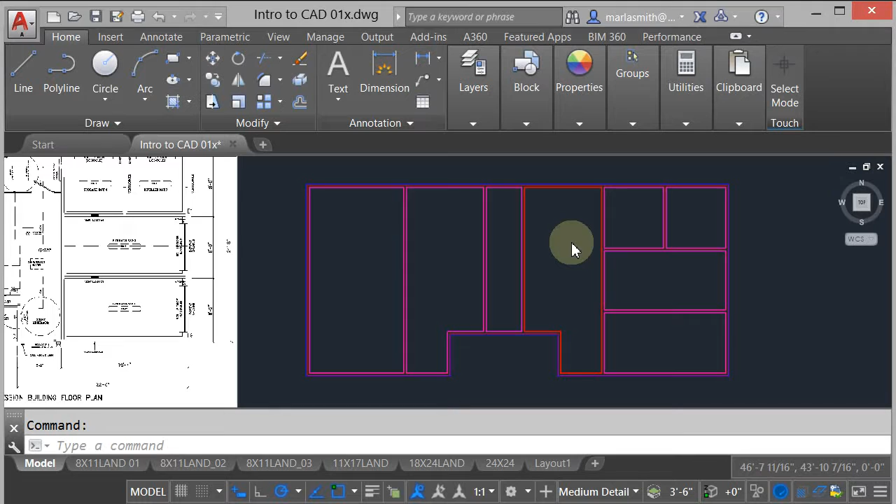So to put the doors and windows in, I have given you a series of windows and a couple of doors, the overhead door and the entry doors, that you can use as blocks. So we'll go ahead and use these.

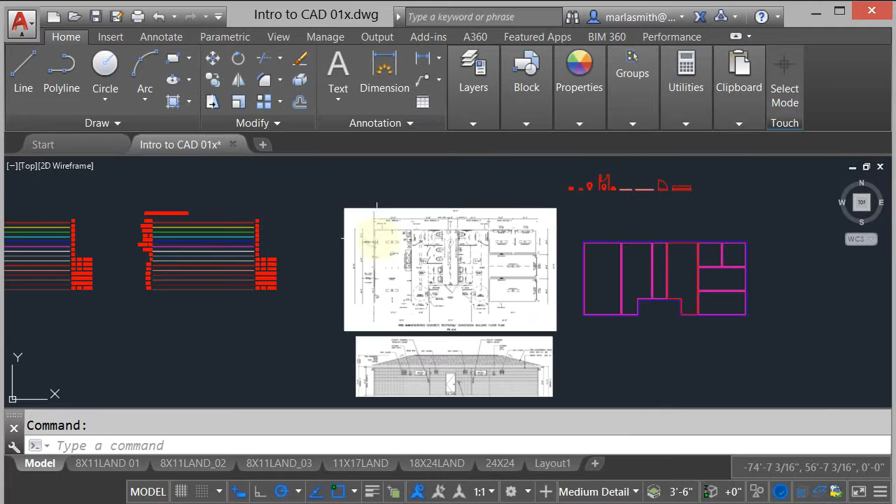The first door I'm going to put in is this door here into the concession stand area. We know that door is 4'4" from the end of that wall. So what I'm going to do is just copy this door. If I select copy, select that door, right click to stop the selection set, I'm going to make a copy of it over to near where I want it.

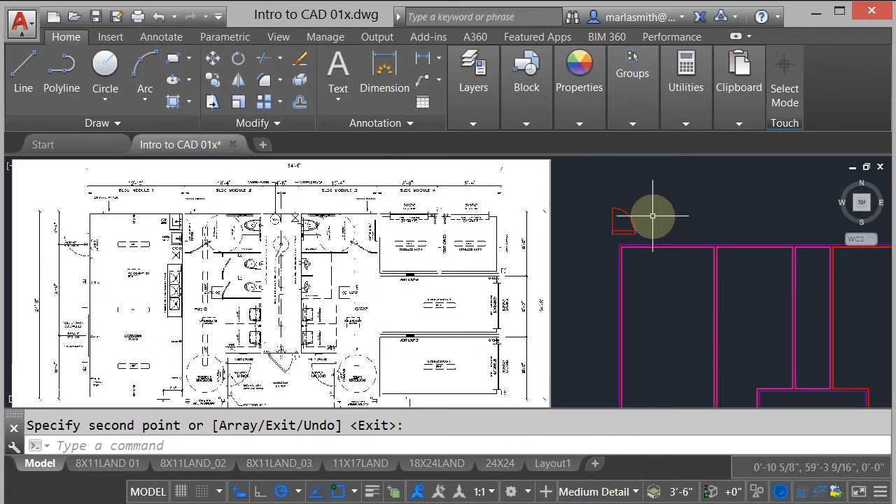I'm going to left click here and then right click and enter to stop the command. Now if you look over here, the door needs to be facing the other way, so I'm going to rotate it. There's a couple of different ways to rotate it. I'm going to use the rotate command right here.

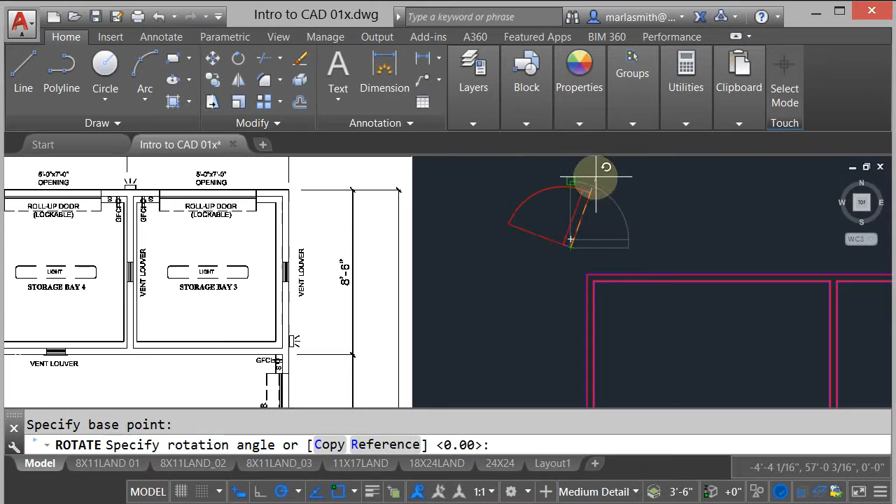So if I click rotate, select the object I want to rotate, right click to stop the selection set, and pick the point at which I want to rotate about, the base point. I can then use my polar to flip it around the other way. So I'm going to flip it there.

Now, the swing needs to be the other way. So in order to get the swing the other way, I need to mirror that. I'm going to use the mirror command, select the door, right click to stop the selection set, pick a point to mirror about.

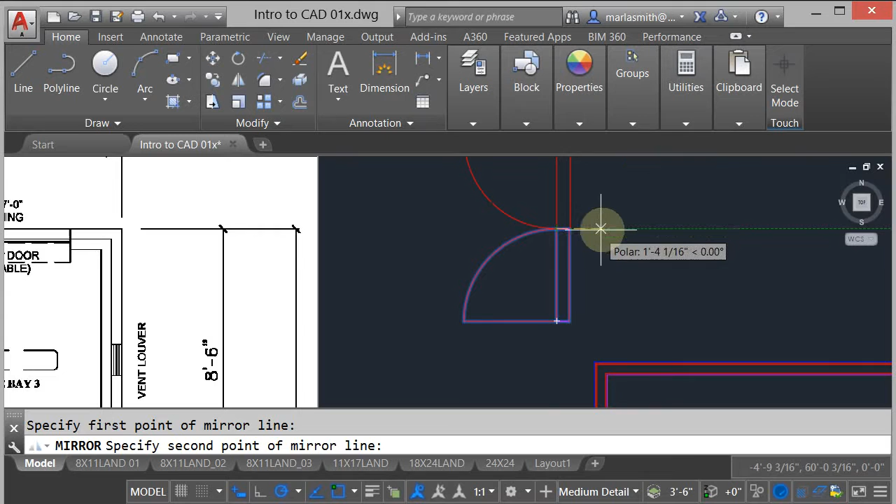It's not really critical where I pick this point. I just want to make sure that after I pick it, I drag horizontally so it will flip it horizontally, as if it's looking in a mirror. Then if I left click, it says erase source object, and I'm going to say yes. So I'll select yes right here, and it will erase the source object.

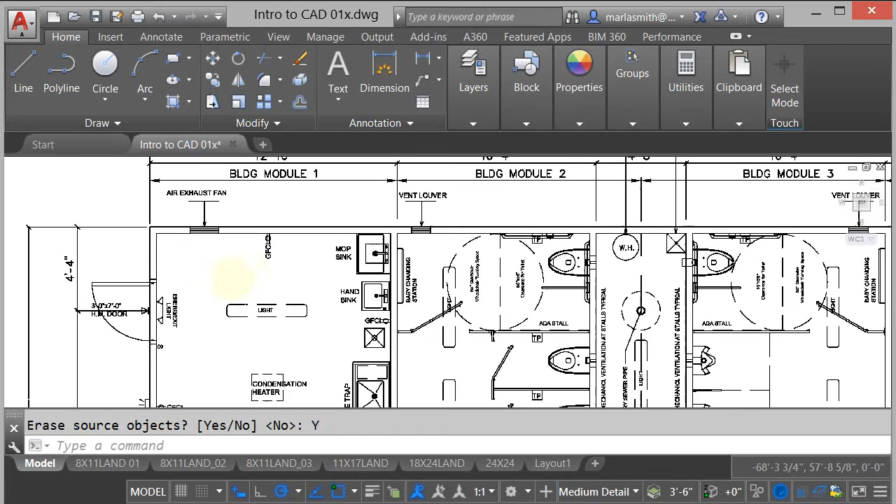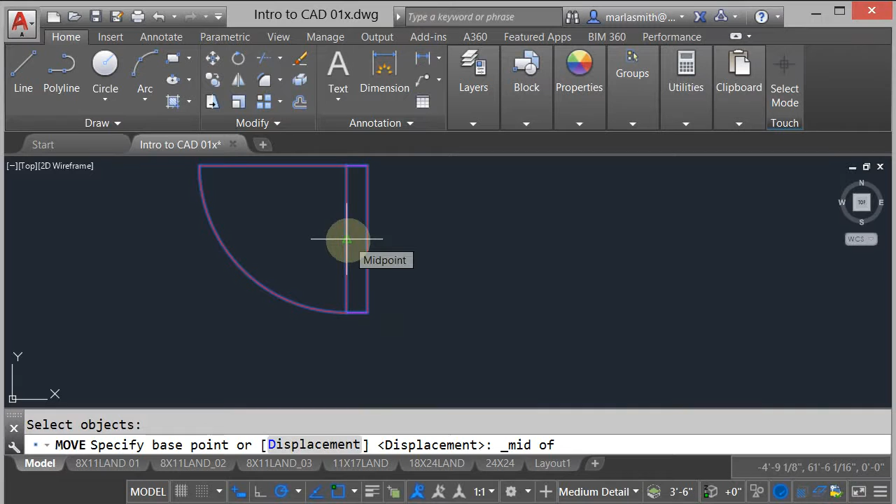Now I just need to move it into place. Again, it's 4'4" from the wall. So I'm going to go to move, select the door, right click, and pick the midpoint of the door. I don't have that snap running, so I'll right click, shift right click, and do my snap overrides and pick midpoint. I'll pick the midpoint of that door, and pick the end point of the stud wall, because I'm going to assume that all dimensions are from stud. So there's the stud wall.

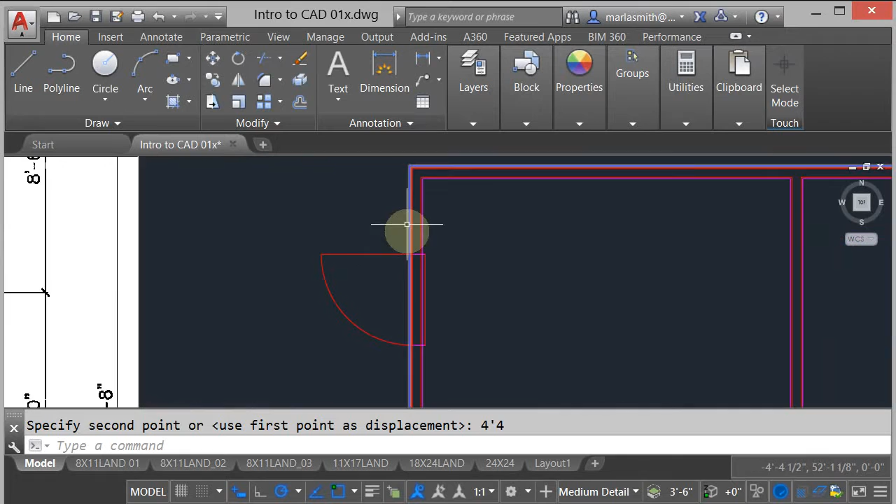And then I'm going to move that door 4'4". Now it's in the correct vertical, but it's not in the correct horizontal. So I'm going to move it again. Select, right click to stop the selection set, pick this point and just move it to there.

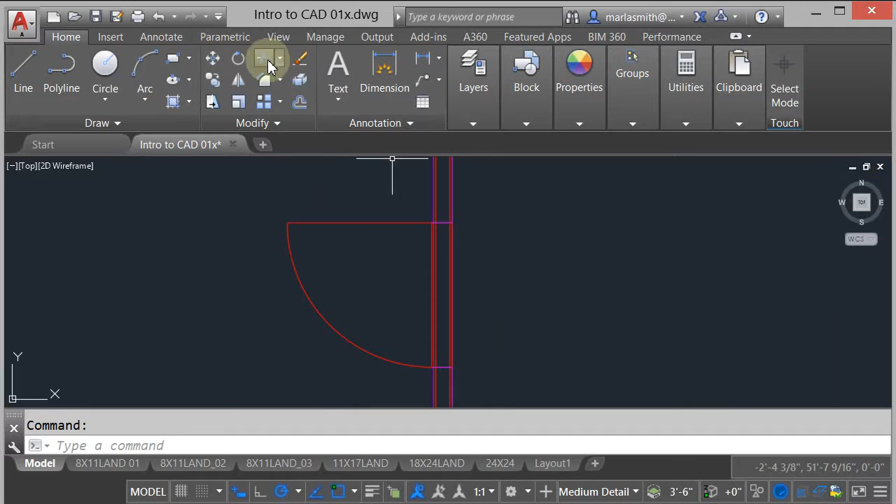Okay, now once I've got that in, I don't want all those lines in between there for the wall, so I'm going to need to trim them out. If I go to trim, I can pick the cutting edges. So if I pick that and return, I can then come in and it will trim out the lines.

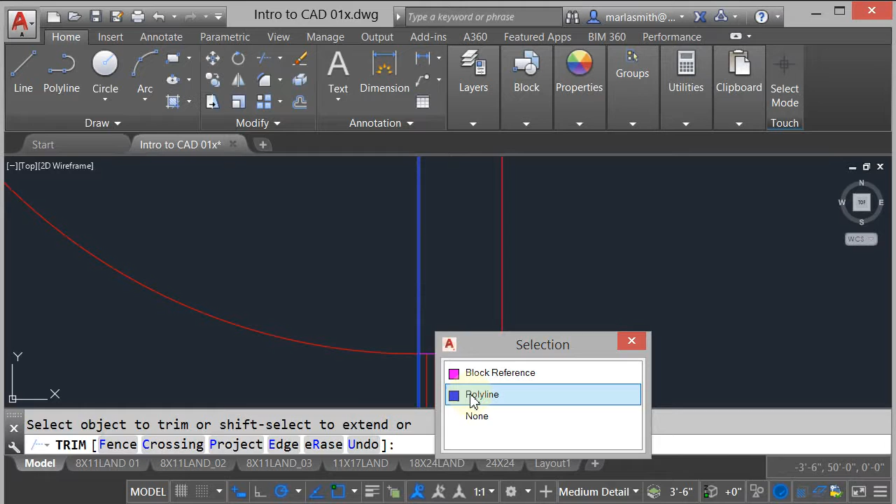You're going to have to pick the polyline, because it won't trim the block reference, it'll trim the polyline. And if you pick on this one, even though it says none, it'll give you the option to pick the polyline. If you're not getting that option, make sure that your selection cycling is on. Okay, so now I've got a door and it's trimmed out the inside of that.

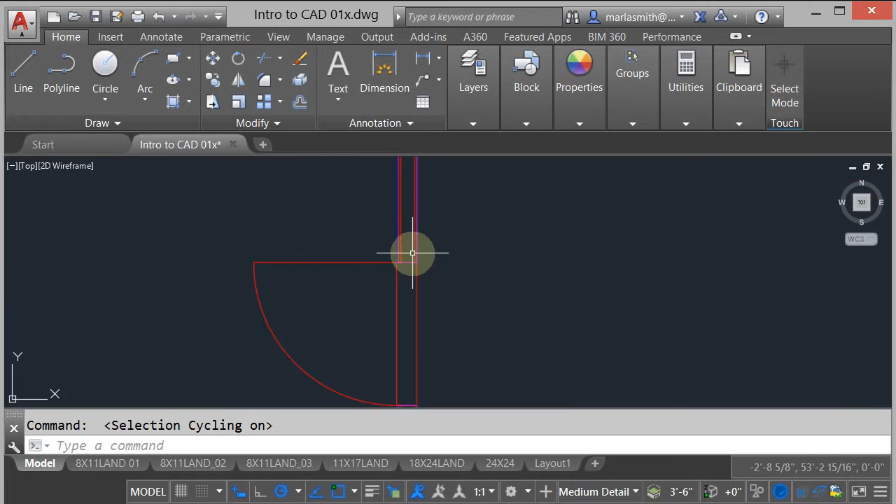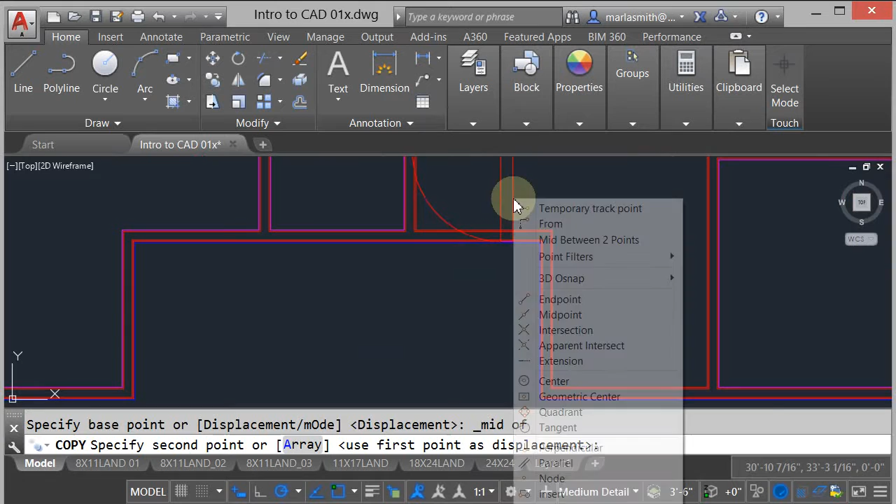Now, these doors, you can assume that they're in the middle of the wall, so you could just copy, select that door, copy it from shift right click midpoint of here to shift right click midpoint of there, and get it in the right horizontal place. And then just move it.

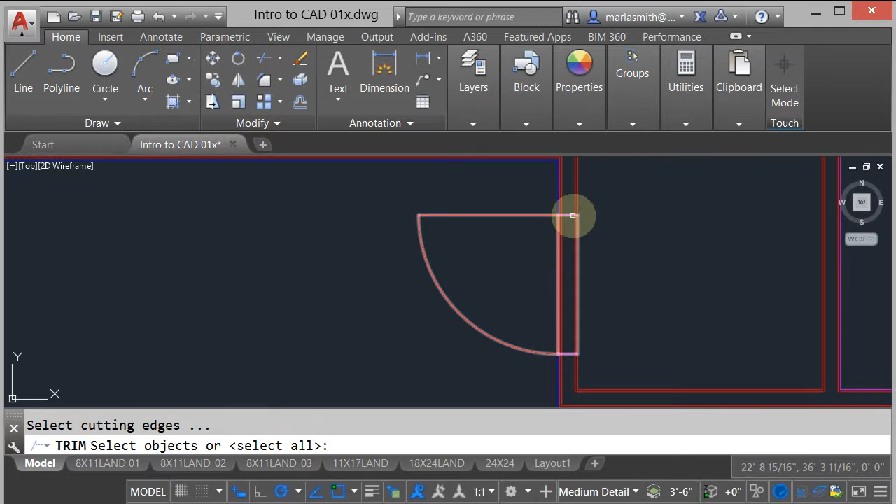So I'm going to go to the move command, select this, move it from this base point to that point, and then again trim it out. So trim, pick that, and you could do a crossing box right there and see if it'll work. Trim, pick that line and pick that line and right click, and if you do a crossing box, it'll just trim everything it can in between those two. So dragging from right to left and then enter.

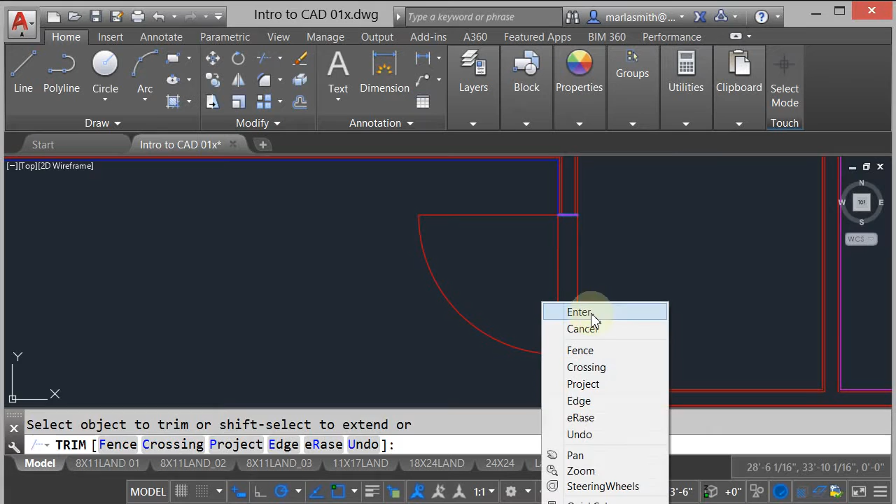And then you can actually mirror this one over to there. So you could go mirror, select that, right click, pick the midpoint of this, flip it over there, and then trim. Whoops, sorry, I didn't complete the command, so it erased it.

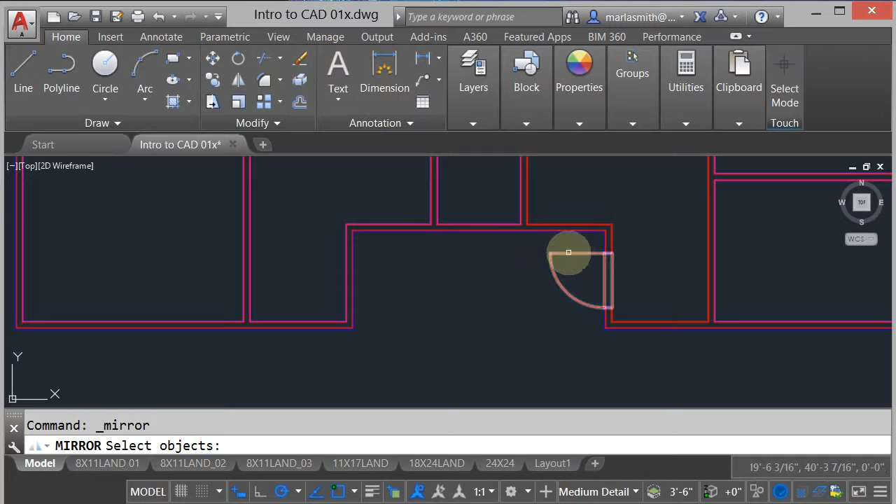So mirror, pick that, right click to stop the selection set, shift right click, midpoint, left click to determine the plane of the mirror, and then I don't want it to erase, and that's the default selection, so I'm going to right click and select enter.

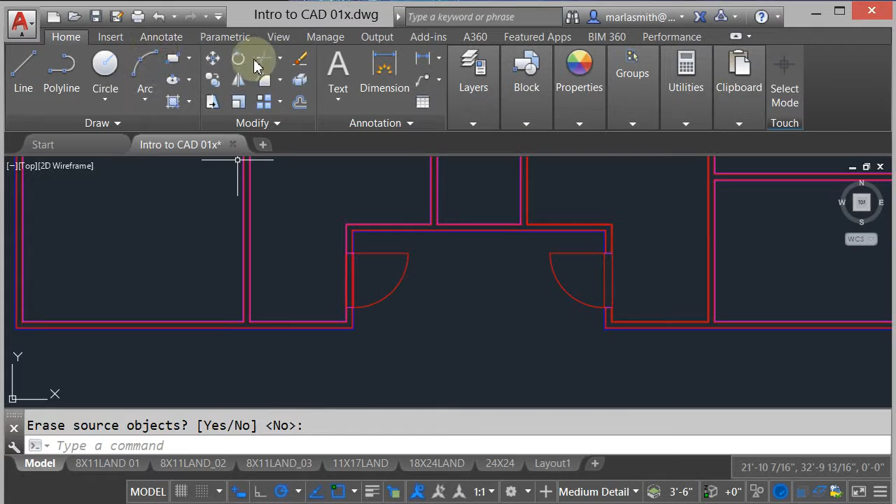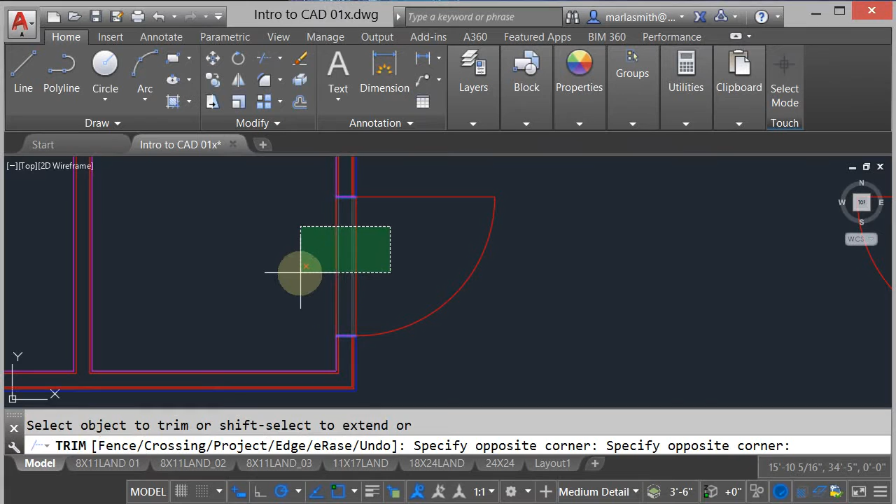Now I can use the trim command to trim that, pick that line and pick that line, and then I'm just going to do a crossing box. I'm going to right click to stop the edge selection, and then left click. Once it says trim down here, I'll left click and drag as a crossing box across there, and it'll trim those out. You can do the same thing with the windows, moving them into place and these doors into place and doing the same process.